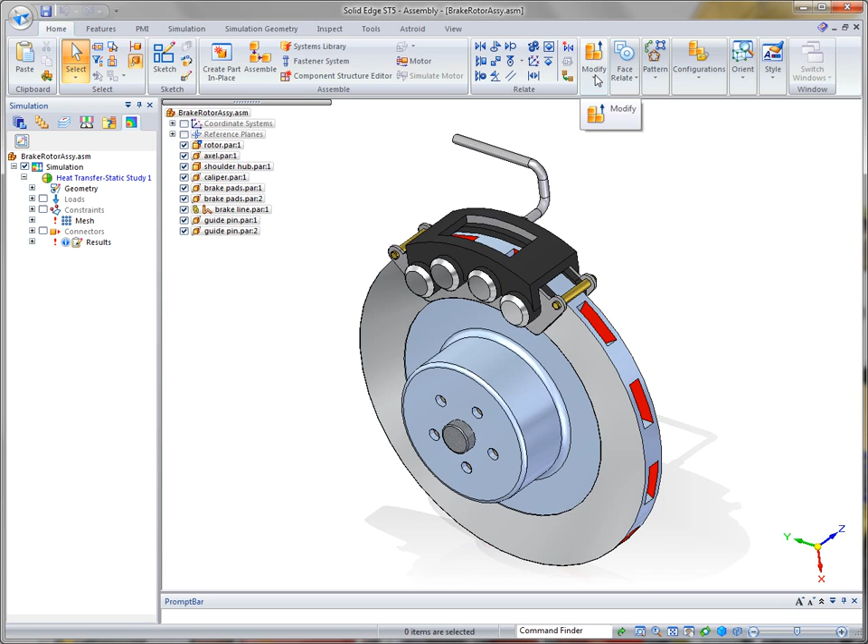But we're really concerned with basically two things: the temperature distribution across the rotor's braking surfaces and the stresses acting at the mounting holes on the shoulder hub. Therefore, what we're going to do is reduce what we're looking at to just the parts that we're concerned with, and that's the inner hub and the actual outer rotor.

So we can use display configurations to quickly change the display of the model. And then, of course, for this first analysis that we're going to run, I'm going to simply turn off temporarily the shoulder hub and just focus on the rotor at this particular time.

Now, one of the key aspects of Solid Edge ST5 is the ability to create several new heat transfer study types. And of course, in ST5, as you can see, we have several. We can create a steady state heat transfer by itself, or we can couple it with a linear static or linear buckling.

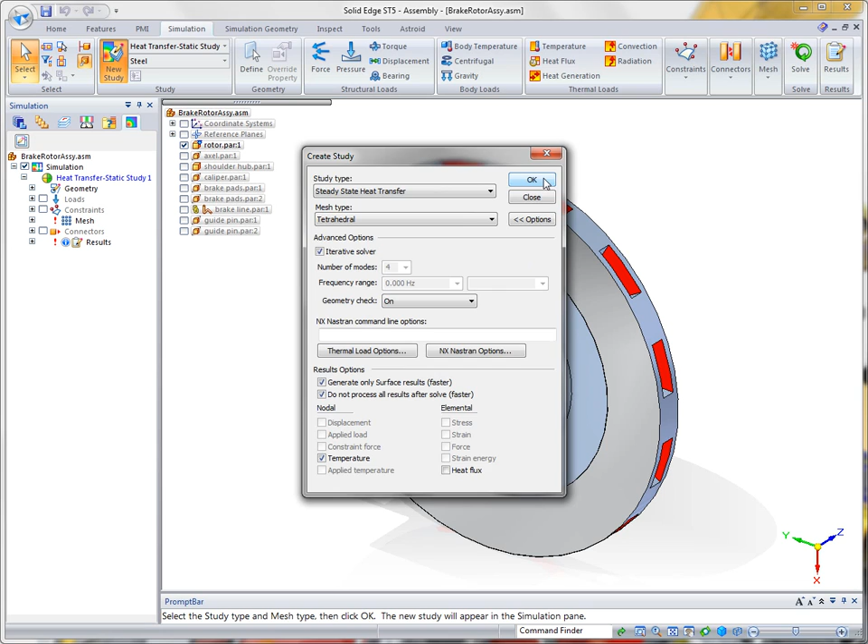Now, of course, if you're only concerned about the actual thermal effects, then you can run the heat transfer by itself, and that's what we're going to do in this first example. Basically, all I have to do is just tell it what part or parts I want to run the heat transfer on. In this case, we're just going to identify the rotor.

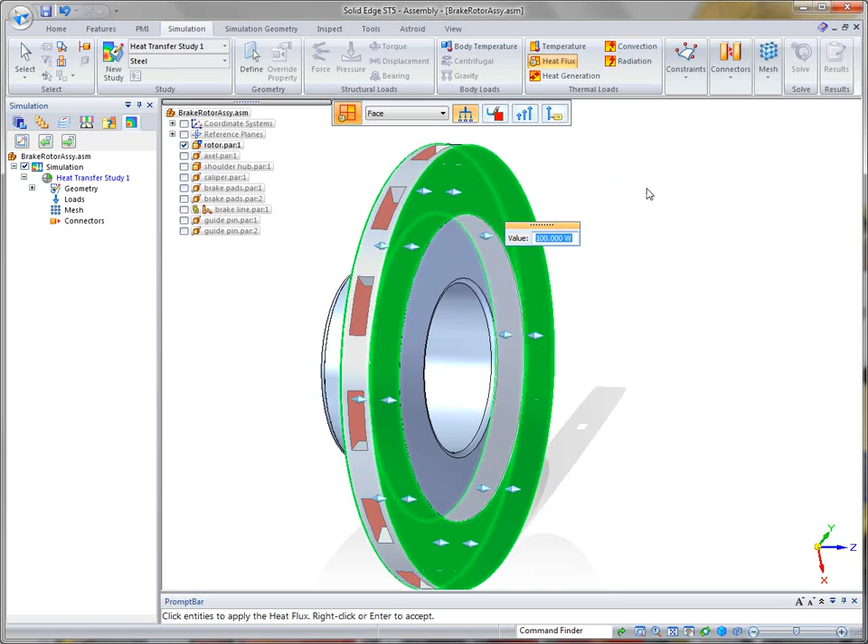Once the study has been created, we can then come over, and you'll notice that the thermal loads for ST5 have been added, and we're going to use heat flux. Basically, with heat flux, I can identify the two faces where the heat will be applied from the disc brake pads, and for our watts, we're going to use a value of 1200.

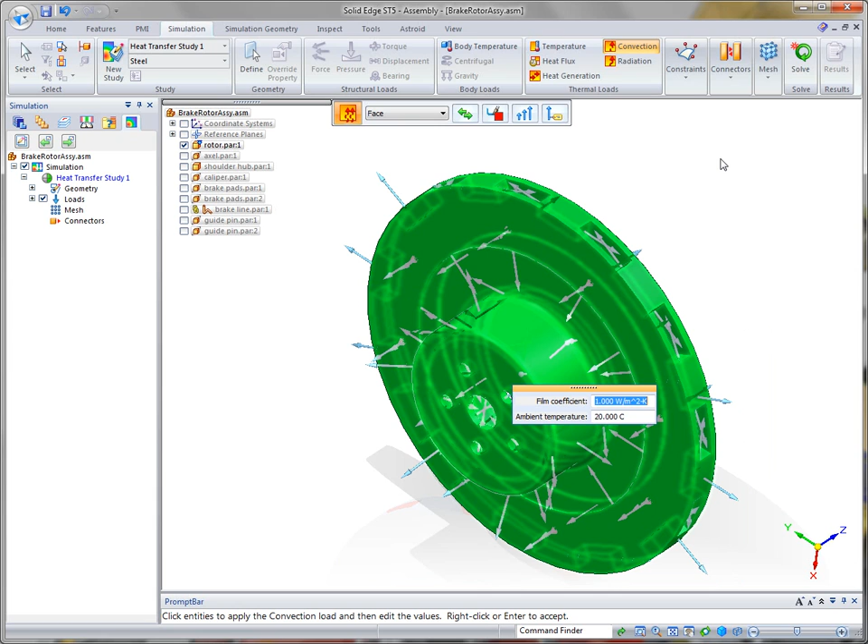Now, once they've been defined, we also want to be able to see how the part's going to dissipate all this heat, and we can define the rest of the surfaces on our rotor just by simply fence selecting. And then, of course, what we'll want to do is not include those two faces where the heat flux was applied, so I'm going to deselect those.

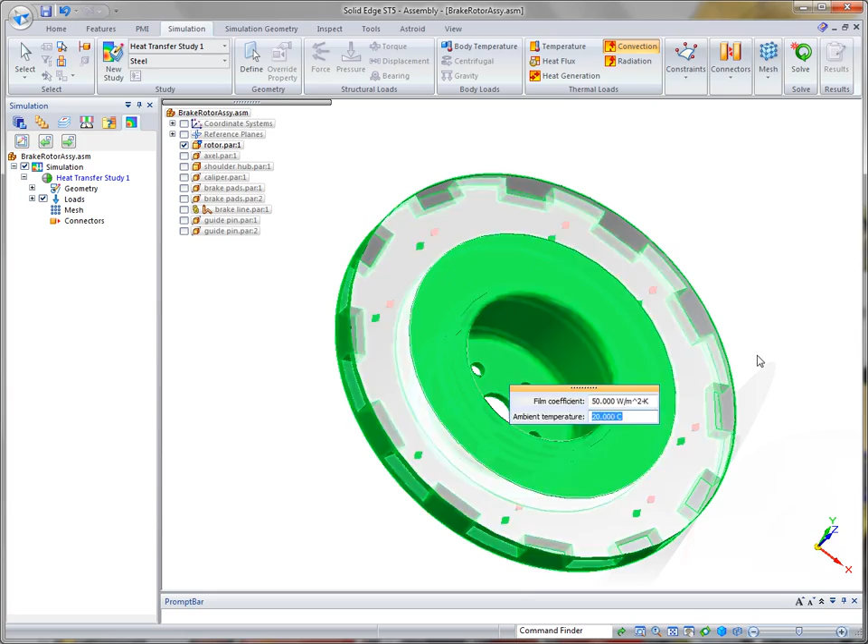And then, for our film coefficient value, we're going to use a value of 50, and our ambient temperature, which is basically the surrounding temperature, is 20 degrees centigrade, or about 68 degrees Fahrenheit. Now, once those thermal loads have been defined, in Study Navigator it reflects those particular loads, and at any time we can turn that information off just to clear the screen up.

So at this time, we can go ahead and run our solve on this particular component. Now, the key benefit of digital simulation is the reduction of cost and time tied to construction and testing of physical prototypes. With the inclusion of thermal analysis tools in ST5, those costs will shrink even farther.

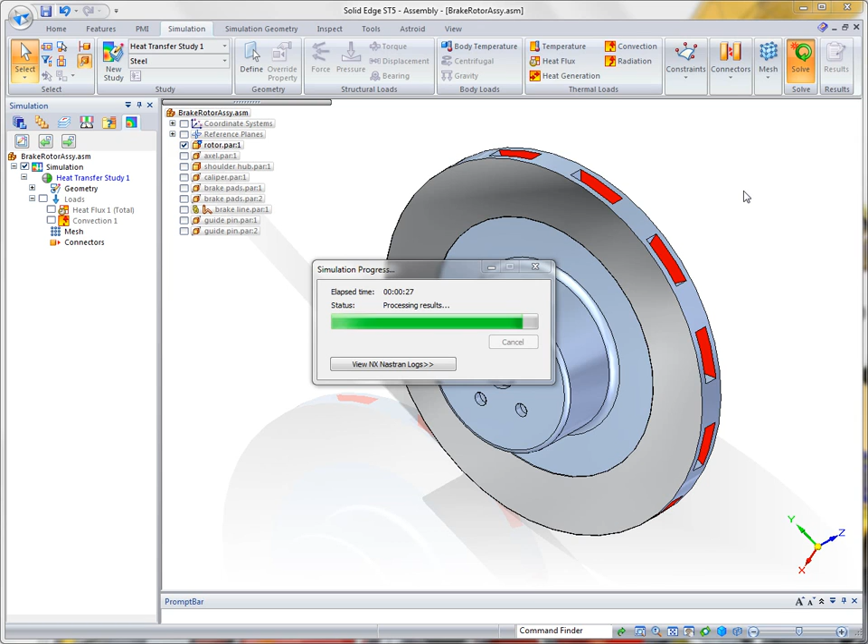Solid Edge simulation broadens the capability of designers to model realistic operational conditions. Often a component under physical stress is also subjected to high and low temperatures. In many situations, it is important to account for the thermal effects, as they can play a significant role in the engineering integrity of the part or assembly.

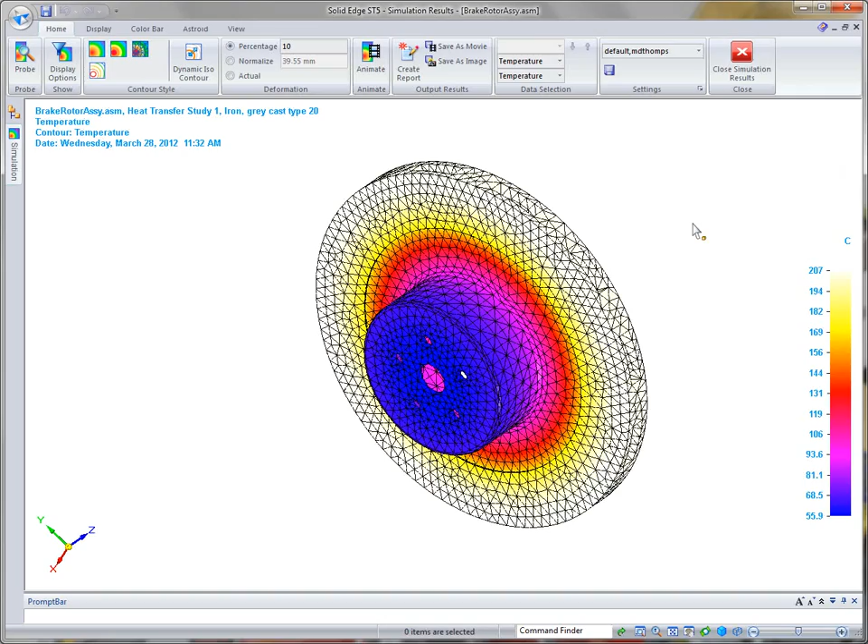And as always, Solid Edge simulation uses our industry standard NX NASTRAN solver to get fast and accurate results. Now, temperature distribution results can show areas where the structural integrity of the material might be impacted by high or low temperatures, as you can see in this particular model.

In this example, by using the probe, the results will show that the rotor is actually hottest at its outside edges, in excess of 200 degrees. Of course, if we pull a probe off on the center, you can see that the temperature drops quite a bit. But with these high temperatures, the part could warp.

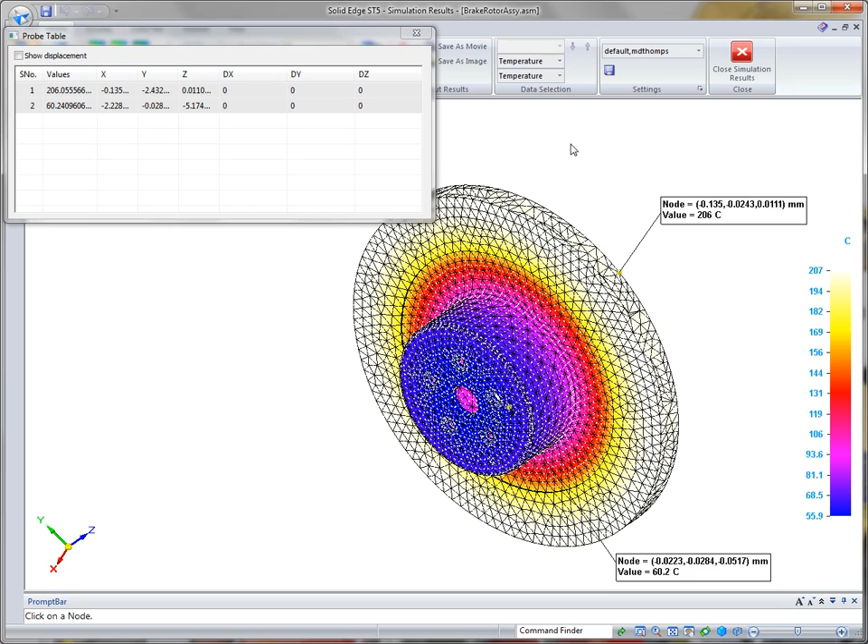So we kind of feel like some edits would be necessary to drop the temperature of this particular component. But that's not a problem with synchronous technology.

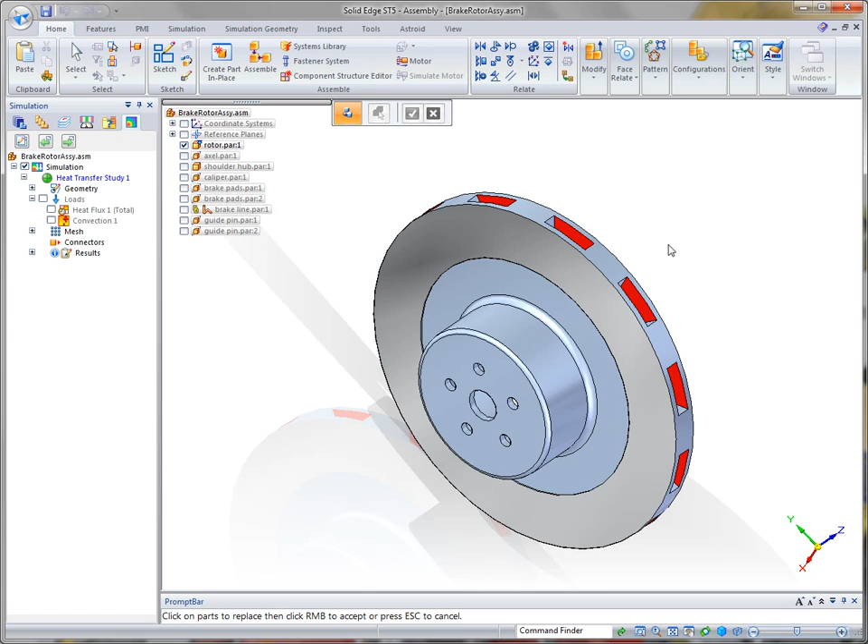In ST5, design iteration is enhanced by a new tool under the Modify group called Replace Part with Copy. Now what this does is it allows the designer to make changes to a copied part without actually impacting the original component. In this case, it brings up a dialog.

We'll use the name rotor 2 and save that. And you'll notice what occurs is the rotor is actually quickly replaced with the new copied component.

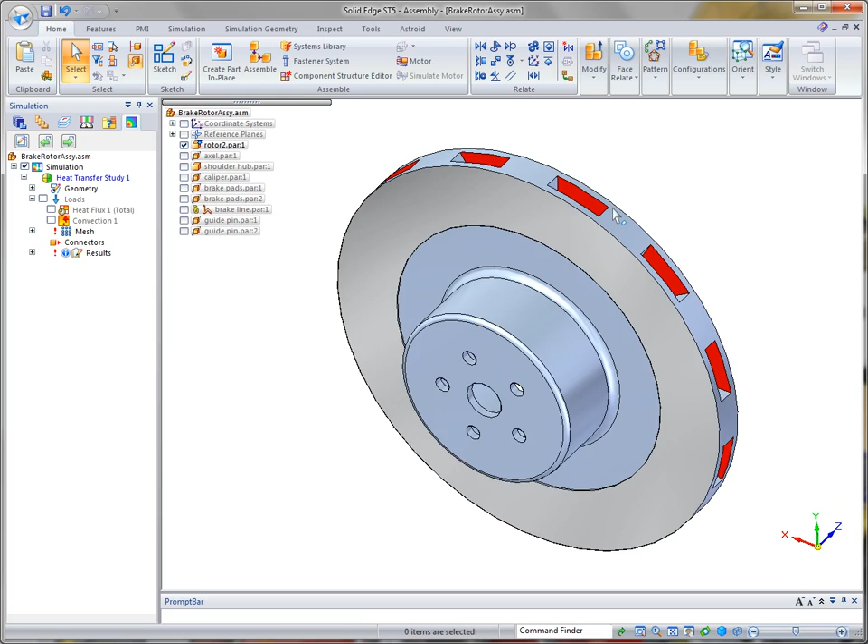Solid Edge's unique integrated design environment lets you make modifications fast using synchronous technology on a single feature, without having to wait for history to update.

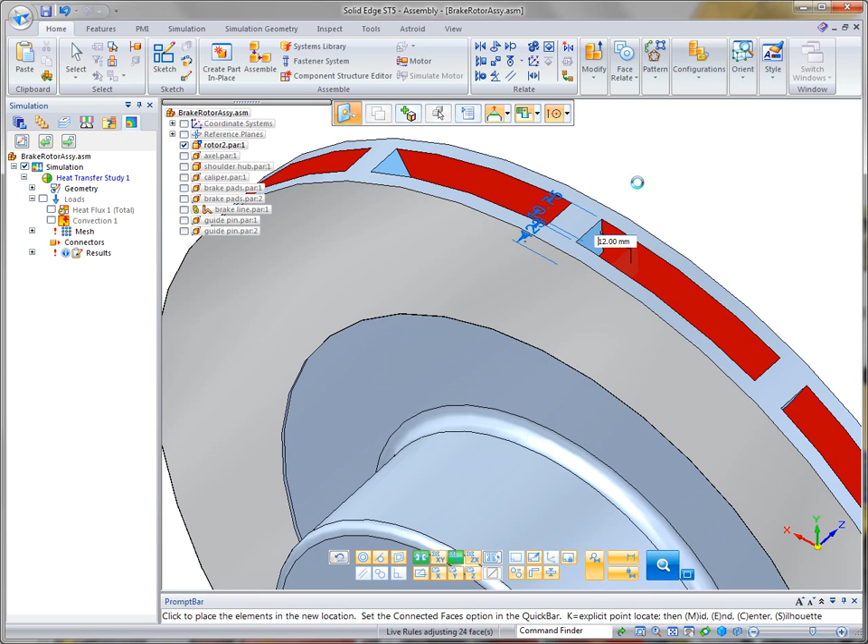What we're going to do is make changes to this particular rotor by reducing the thickness of this rib. With synchronous, at the assembly level, I can identify a face, and in this case all of the slots are changing at the same time. We can key in a specific value and make that change very quickly.

If I want to add strength or change the design in any way, we use a tool we call the steering wheel, in which I can identify the outside ring on the steering wheel, and add an angle to that particular rib.

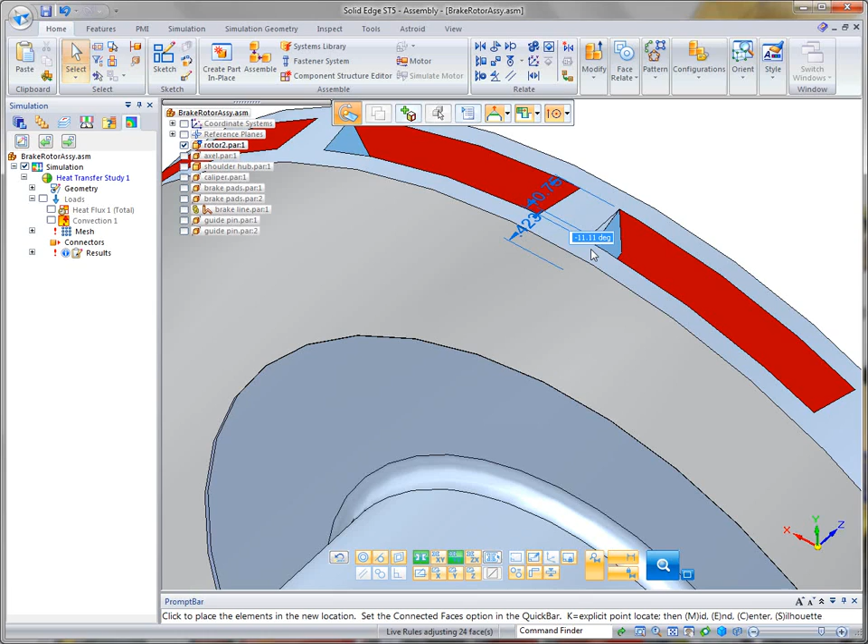When that's complete, because I've removed some material from the rib, I might want to thicken these two plates just a little bit by identifying that inside face. You'll notice some dimensions in the part environment for this model appear, so I can make those changes right here at the assembly level.

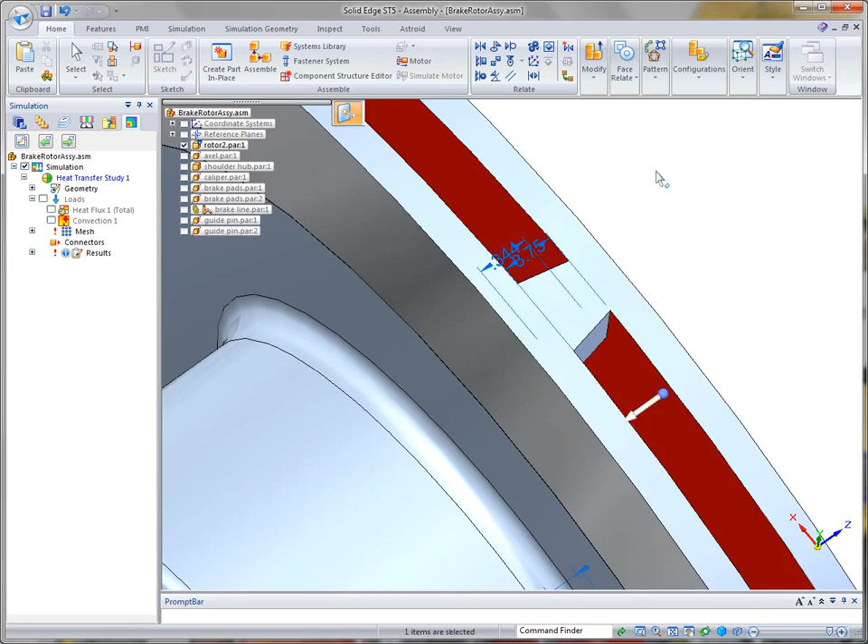In this case, I'm going to add a millimeter to each side, so I can key in a value of 8.75, and you can see the model thickens up on each side by 1 millimeter.

At that point, we're ready to solve the model again. To resolve, we'll go back to simulation and tag the solve command. So downstream of the design change, the simulation results can be updated by simply solving the model again. The design derivative performed in a matter of minutes instead of hours.

Now we just wait for the heat transfer study to process and finish up. In a matter of seconds it will begin to finish this process. Here you can see it's already processing the results.

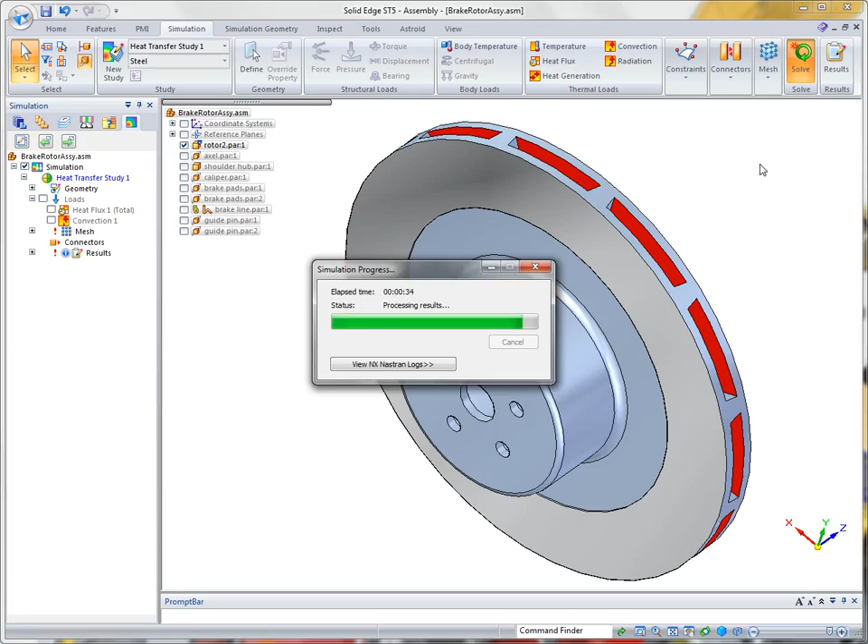We'll see where the temperatures hopefully have been reduced from the design changes that we've made. You'll see right away that we've dropped the temperature of the rotor at its highest point about 10 degrees centigrade, and we got it under our threshold of 200 degrees centigrade.

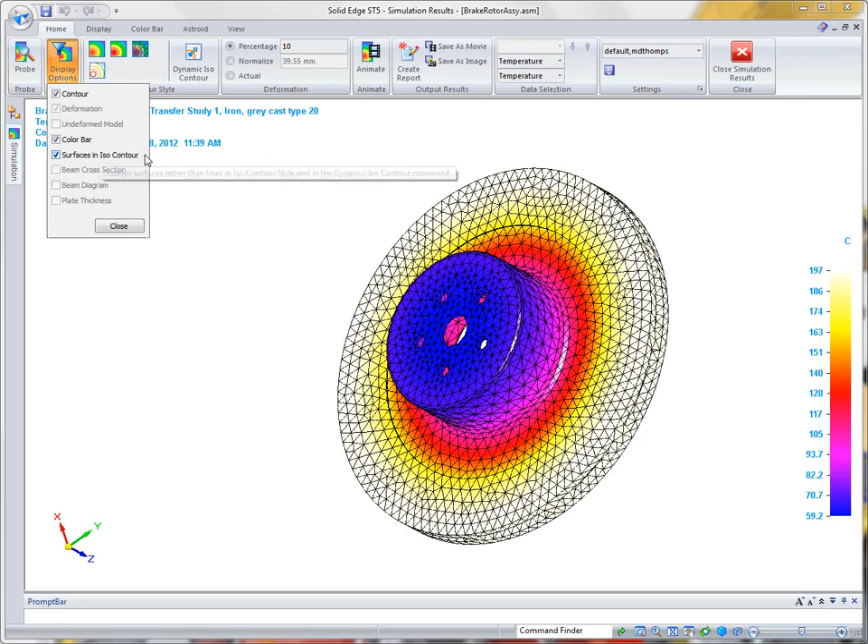Also in ST5, we've added some display options to enhance your ability to evaluate the physical and thermal effects of the model. Under the display options we have surfaces in ISO contour, and we can also look at the model in ISO line. If I simply select that command, it's going to show ISO lines on the color bar and their values and where they are applied in the actual model itself.

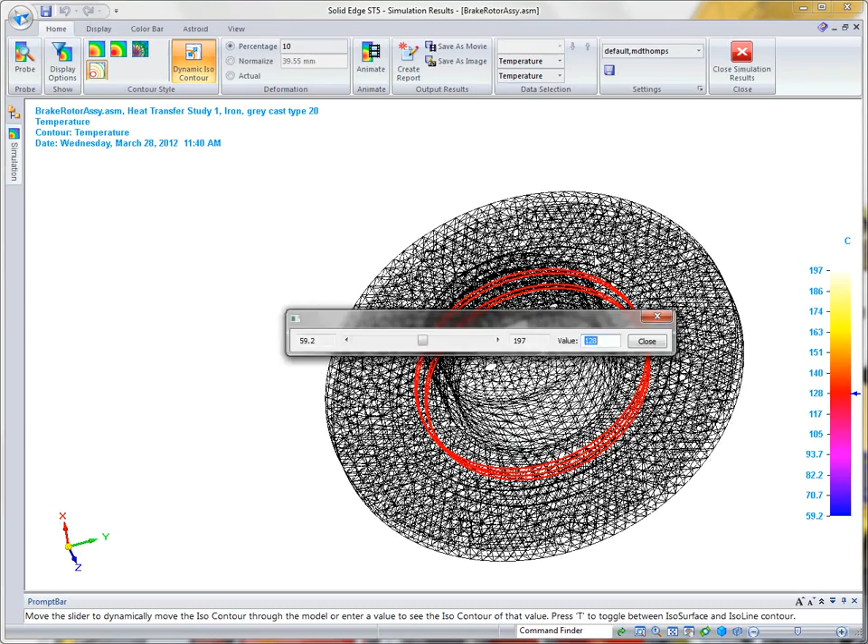We've also added a dynamic ISO contour tool that allows you to simply scroll, and you'll notice the arrow on the color bar changes as I scroll the value, or we can simply key in a value, in this case 128, and it shows where that resides in the model.

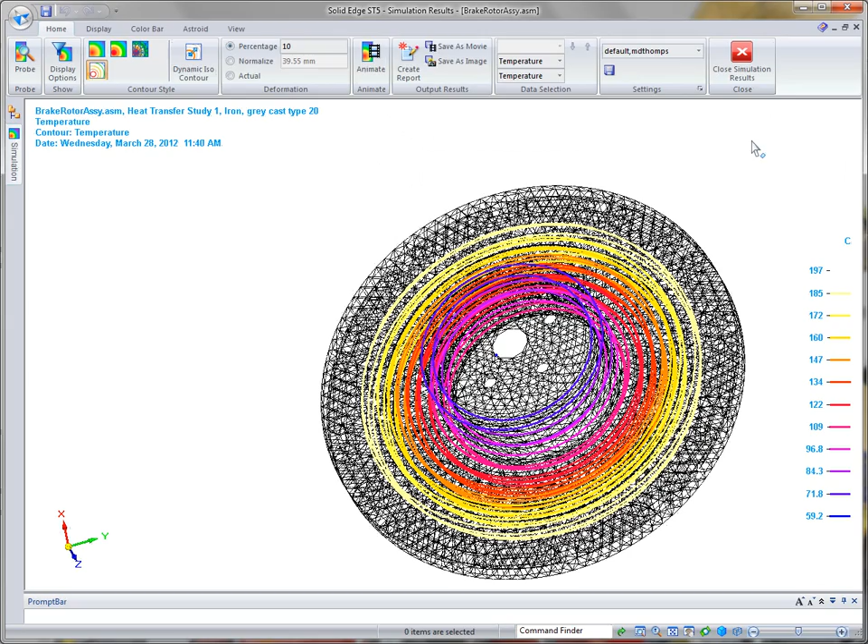Now that we're satisfied with the results from this heat transfer analysis, we can close the simulation results and go to another study that we've already performed.

One of the key enhancements in ST5 simulation is the ability to couple structural and thermal analysis study types. Combining linear static and linear buckling with thermal conditions provides the designer or engineer with the ability to replicate realistic operations of the component or assembly.

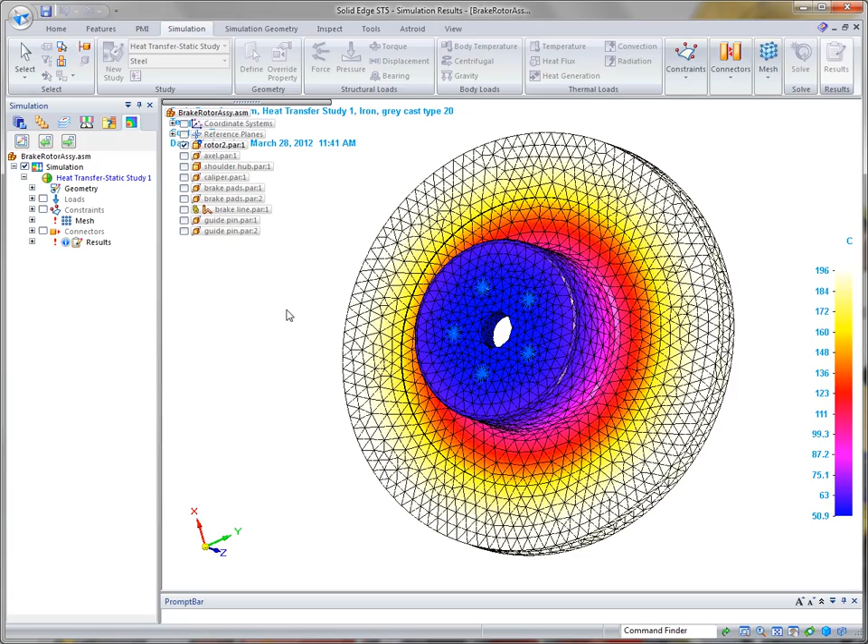For this demonstration, we're going to display the results of a coupled linear static and heat transfer study. The study's boundary conditions are predefined. A bolted connection, where the hub connects to the rotor, was defined with 5 bolts, coupled with the same thermal conditions used earlier.

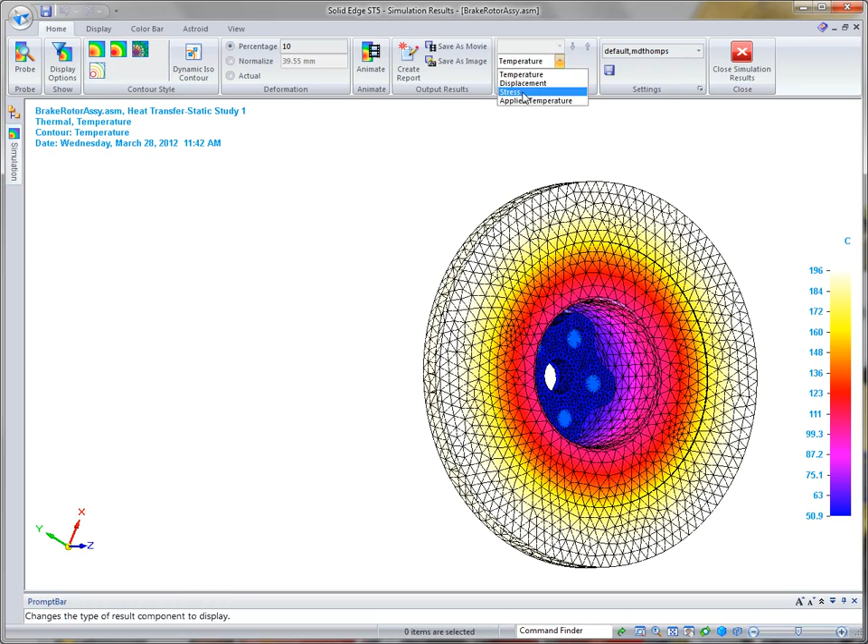Here we're looking at the temperature, which we saw earlier. But we can also view the stress where the bolted connections were made between the actual hub and the rotor as well.

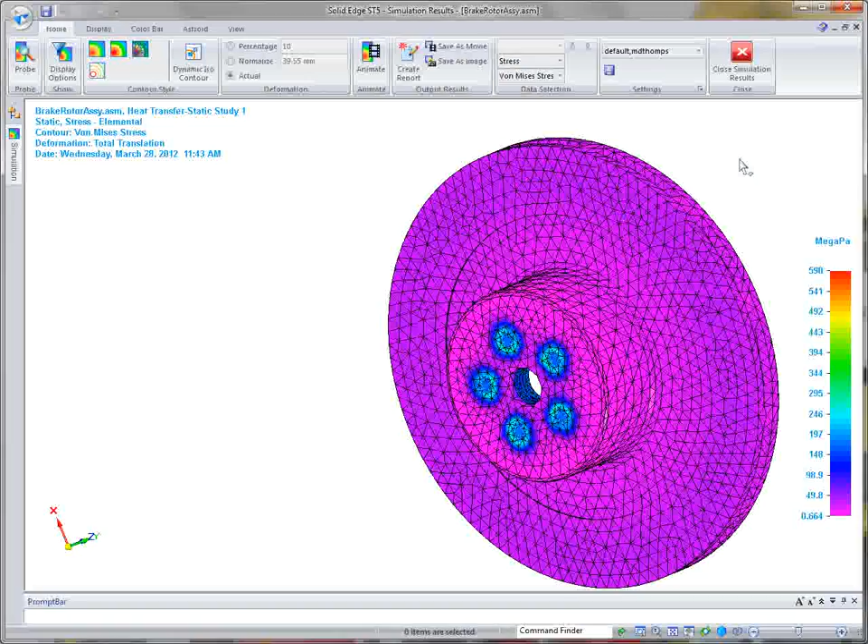The cool thing here is that the heat analysis was also applied during the stress analysis. In this case, we can view the rotor stress around these bolt holes, to determine if any failure could occur from the effects of constant braking while this truck descends down the mountain.

And then, of course, we can also take a look at the displacement if we want to look at that particular type of information. When we're done with this particular study or any study, you can always create a report.

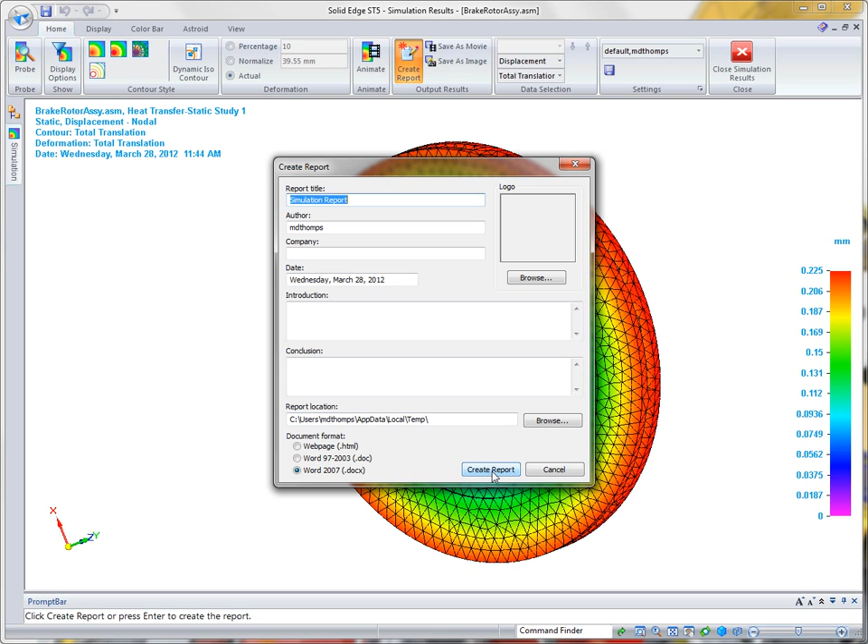It brings it up and you can add your company logo, the author, the company name, and that type of information. And then you can simply create a Word document or an HTML page.

In this case, I'll just create a quick HTML. You'll notice it takes a snapshot of all of the results for this particular study. And then it brings up the HTML file with hot links to each part of that particular study.

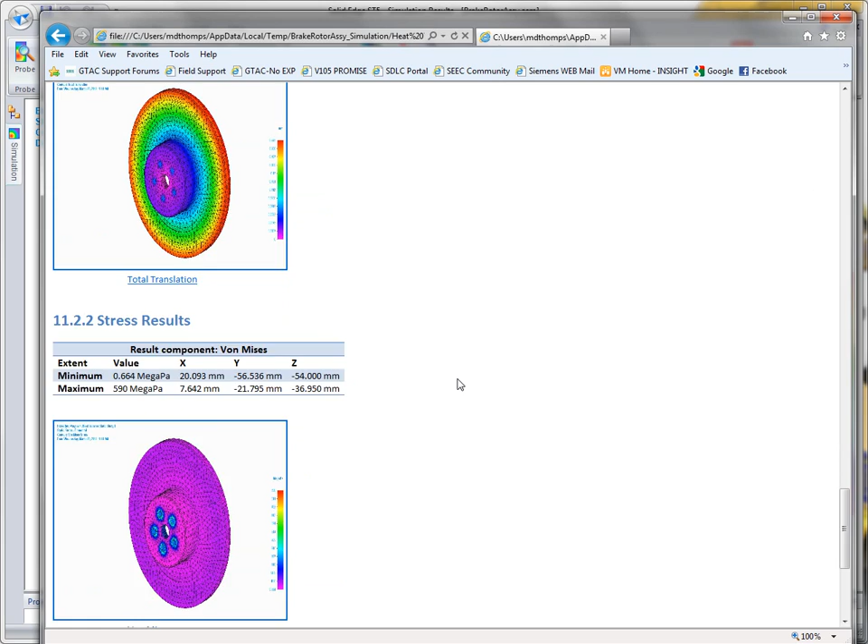So if I go down to, for example, the results and click on it, it takes us and shows us the results and those particular values, the minimum and maximum values. A great tool to create reports for management or for the folks concerned about whether this model is going to withstand these types of temperatures under these conditions.

With these new thermal capabilities, a broader set of operational conditions can be modeled. Analysis is optimized, leading to more accurate results. Designers and engineers can try out more product alternatives while reducing the material and engineering costs associated with physical prototypes.

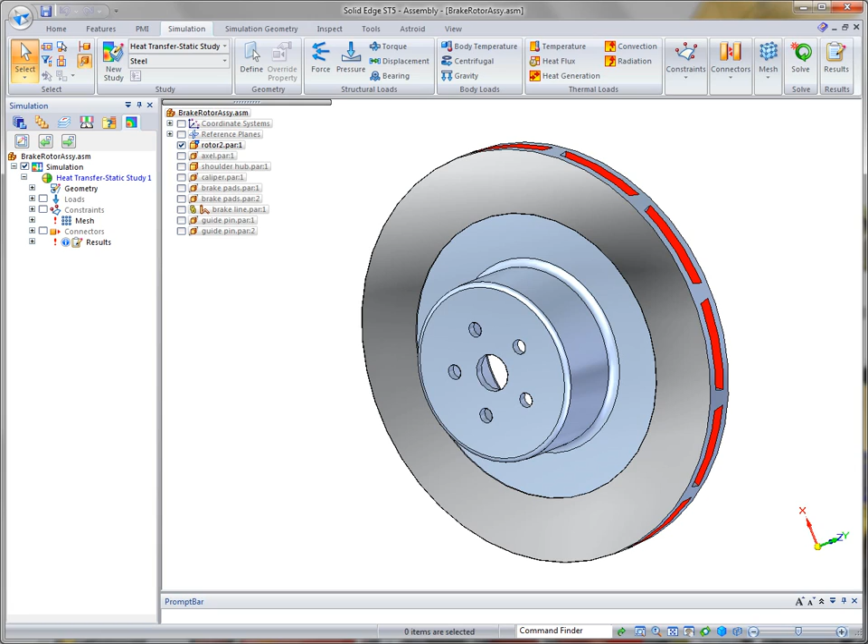Solid Edge ST5 simulation, folks. Design better.